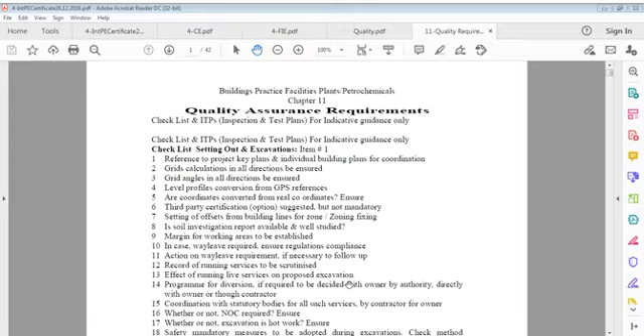This is in continuation to all that, and these are certificates. This is IntPE certificate, that is this one, and this is another certificate, Chartered Engineer. This is another certificate, Fellow of IEI, and then quality noting, and certain files and more files. I'm showing you for certain reason.

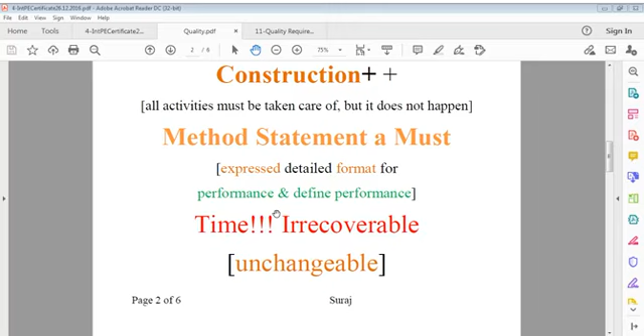And if you find that what you do can be better, then you can amend the statement. Not for you, it's for those who require your knowledge. Others will read this and they will like to make sure, yes, you are doing it this way. Once there is agreement that we are going to do this, that's the important point here. Why I'm stressing a method statement, that is the only reason.

It should be in expression, it should be in format, and it should be for performance and define performance. It's not simply that way, so you'll get this. No, you have to define. You have to define in sequence. How shall I get it? Based on support of material, based on support of drawings, based on support of codes, based on support of, you can say, past experience, all that. And you can refer to some project experience also if you wish.

And there we can say, we just take out from those statements redundant explanation and just put point to point, so that the message is communicated properly to the site line person who can easily do this or implement this. That procedure, that method statement, you must understand. It's not easy because you have to write something in 2 or 3 pages, not in book form, but you can talk a lot on that. So whatever you talk, whatever you learn, for something to be done, you may have to follow someone else's statement or your own statement, which others may follow.

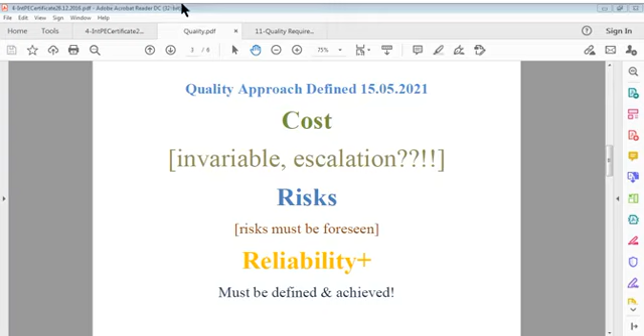And that is where we consider these factors, and that's why I'm saying reliability: you do something and it is reliable, then you do it again and it is reliable, then you do it again, it is reliable. Reliability, then reliability, like that. You have made sure that whatever you did is safe, whatever you did is serviceable, and whatever you do is durable, because durability is important in our world, the construction world, the design world.

If you just think of safety, and if you just think of serviceability by the use of the material that we produce, and we don't care for the durability requirement, the durability criteria, we can simply say we can't calculate the life cost, the whole life cycle cost of that material.

Today it looks fine, it's safe, it performs, but if it has no longevity, if it is just finished in 2 or 3 years in place of 40 or 50 years, this means you are going to lose. But if the same works for 50 years for me, by whatever way, I think it will reduce my cost. Got my point? You can take the example of polythene, the example of plastic. What happened?

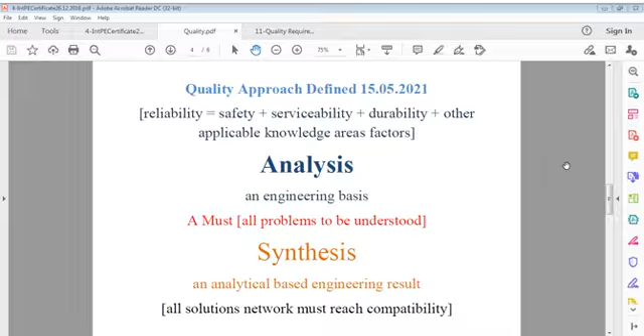I understand that analytical study is no less than worship. Is no less than worship. Because when you work with the persons, you can say my God gift, I should say God gift, is for everyone, and that is thinking. Thinking.

So there are some people who run away from thinking. Wait, I'll think. And other people consider thinking as religious, because thinking helps you. Thinking brings you out from unnecessary tension. Thinking is that part of life. And in engineering, I think thinking works at every step. Every step. It's not a verb. It is a whole world.

If you break this word, it's THIN and KING. Can you understand that? What does it mean? Well, that was just an aside. Now, we say engineering. Engineering means application of sciences, application of physical sciences, other sciences, application of technology. Right? That is engineering, and this must be achieved.

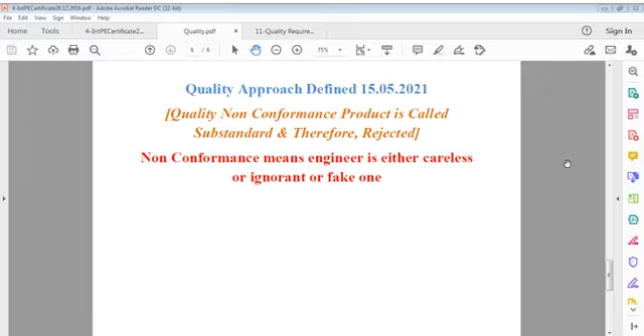When we say that engineering is advancing, what does it mean? I say engineering is not advancing, your thinking is advancing. Your understanding of materials is advancing. That is advancing. Engineering is use of mind. In fact, if you define engineering straightaway, I would say engineering is use of mind, because it's not only reading or writing, you have to analyze that material, to understand the theory of that.

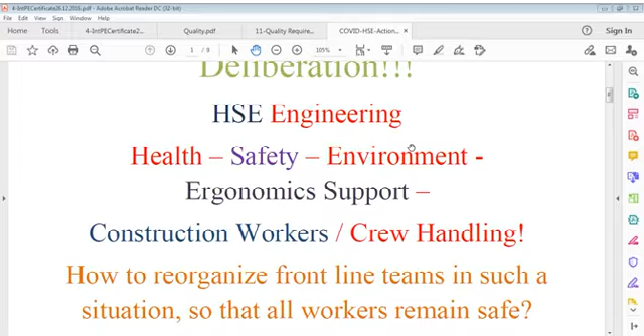Actually, in the contents of a method statement, if you leave behind scope of work, it starts with safety. Safety, health and environment we define to some extent briefly, though safety is available in the safety plan. We cannot simply write refer to that plan, because nobody has time to refer to it during the construction stage or during one or two days of construction.

Now, we have to define how we shall maintain health, safety and environment on this activity or on this project. We have to define that, and it's part of HSE. And before the HSE definition, we have to define what materials we are going to use and what drawings or other relevant parts.

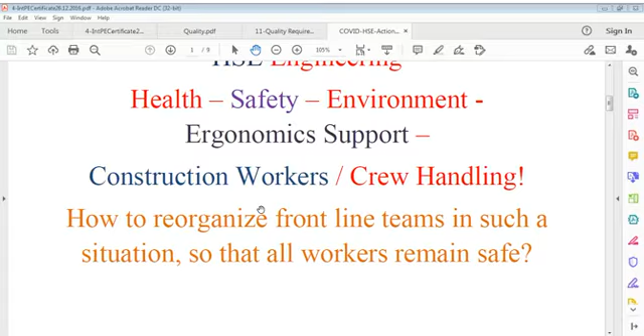How to reorganize frontline teams in such a situation so that all workers remain safe is a big question. And it is the responsibility of the entire engineering professional community, I'm saying it includes electrical, mechanical, and all others who are involved in our project, to contemplate on working issues that would be impacted due to additional protective measures required to keep off this ailment or this pandemic.

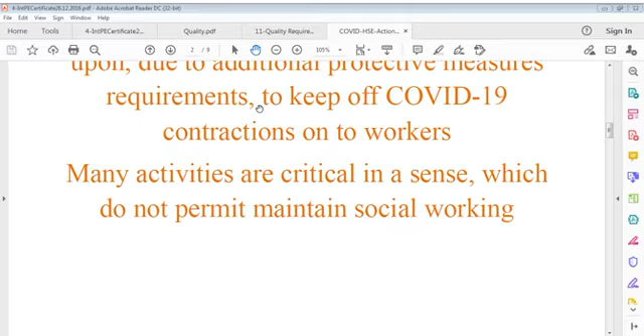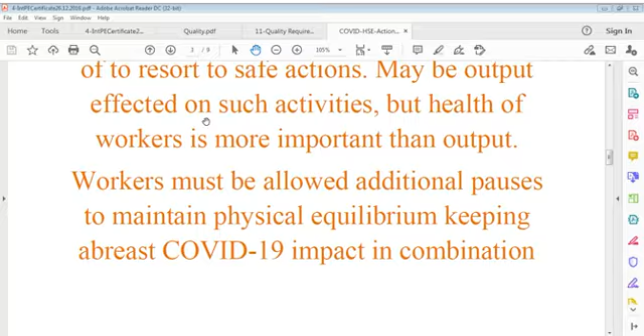Workers must be allowed additional pauses to maintain physical equilibrium, keeping abreast of this pandemic COVID-19 impact in combination with high temperature and variance in humidity. You know that high temperature and high humidity are supporting circumstances for the virus to develop.

Fresh air they should get in normal working, and when there is no normal working, for example, there is construction of some shell or some silo or some big tank. After the foundations are over, walls are over, you have to work in that, and sometimes your top cupola is also over. How should people go inside to work, and when they work, what should happen? This is a very true part of the problem.

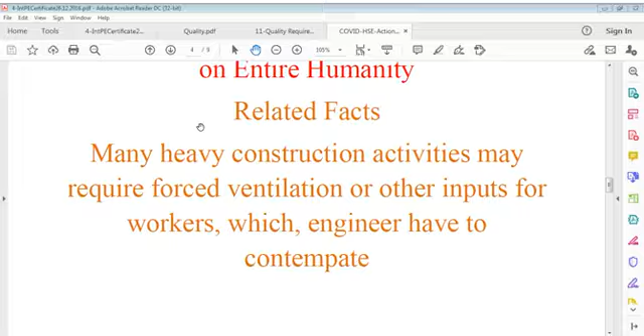We have to contemplate that many heavy construction activities may require forced ventilation too, or other inputs for workers which engineers have to contemplate. Now, these are all problems I'm showing to you, but I'm not going into that much. I'll just give you what I was saying regarding COVID-19.

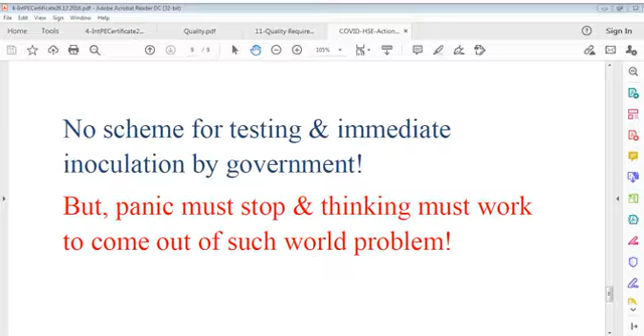Quality and safety are such related together, that without safety and without quality, survival is very, very difficult. Very, very difficult survival. We have to consider this point clearly, that survival is difficult.

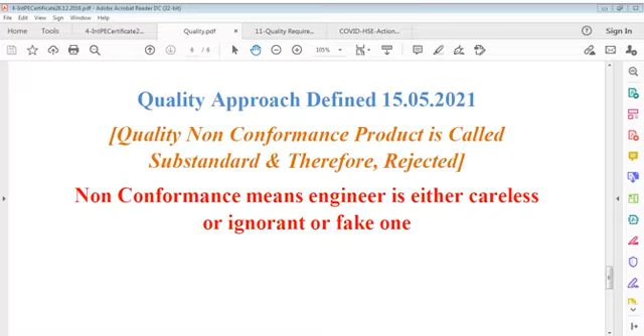So now, I've been involved in my thought to share with you. I do not claim my thought is wonderful, it's not, you can say, an exclusive one. But whatever I think based on my small experience and what I consider is better. Maybe you have better ideas than that. But I'm sustaining myself. So I'm giving you some imaginary views, imaginary talks where I feel a good one.

When I start quality checks, it looks as if it is something extraordinary. I also used the same in the beginning when I did not even start writing in newspapers.

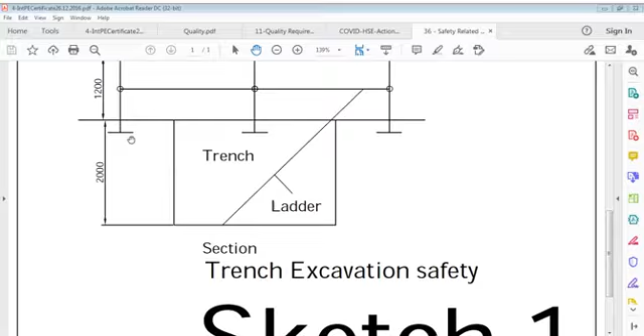And here is the section. Let's say I've taken 2 meters depth here, and the railing is here. This rail is called a safety post. I have put temporary safety railing around. Posts are here. This is enclosed access, where some area is available for access, and there's a ladder here. If it's more than 1.2 meter, 1 meter, we require a ladder because we can't jump. So this is an aluminum ladder here, a small one.

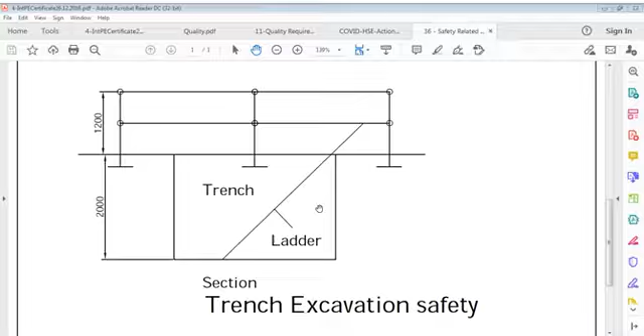So what do you actually need? If you want to excavate, we have to do it this way. This is trench excavation: a trench with railing around, 2 meter depth of trench and 1.2 meter height of railing. This is very practical for ordinary construction, and you should have this system on site before doing anything. I'll explain the sketch also. This is, of course, a safety related sketch.

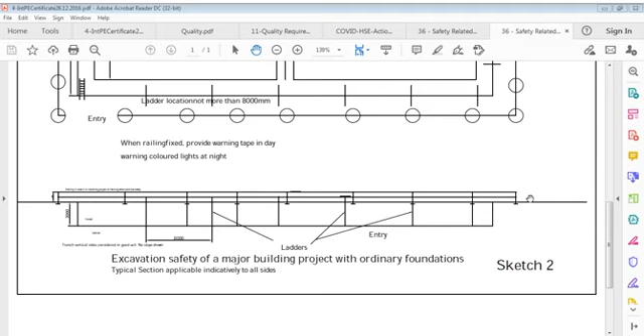Excavation safety of a major building project with ordinary foundations. I have named it sketch 2, and this is a typical section applicable indicatively to all sides. This is what it is. Yeah, this is the sketch here. You can read yourself what that means.

It's the portion of the building where you have to work. This is the building area, and there's a safety provision around it. These are fence posts or railing, indicatively, complete railing around, say 1 meter away, or as is practicable for circulation. This excavation is not mass excavation. This is limited excavation, a continuous trench, say 2 meter to 3 meter deep.

For example, this is your foundation portion here. You have to excavate and keep it safe like this. You have to excavate and remove excavated material simultaneously. So on site you will find the trench like this, and this is earth area, this also earth area, and this also earth area.

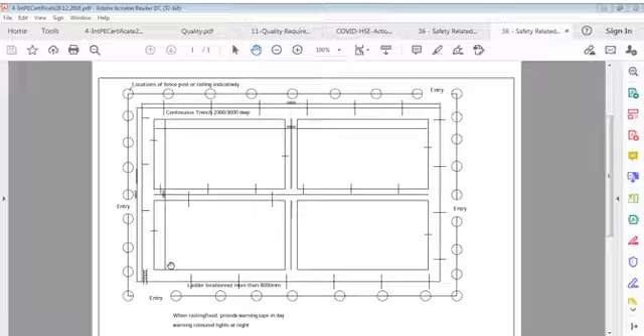That's a basic requirement, because I say the trench is deep, maybe 2 to 3 meters, and the width is of course natural. Whatever is not written depends upon your design. And these ladders here, these are all locations of ladders. I put this location, this location. These are locations of ladders, and this dimension that is used is 50 meters.

Let me just blow it up again. This is 50 meters here I used, and this is a very important one, from this point of view and that point of view, and I have to fence it accordingly. This fence is very important, and we have to think about this in a professional way. It's very professional. We have to think about this.

What is this here? Why is he calling? I don't know what the reason for that is. Who's this? Good morning. Yes, how are you? Hello. What do you want to say? I'm not hearing you. I'm okay, tell me what you want to say. I'm busy on video. Okay, okay. This was somebody who called me. Good morning, Mr. Chaudhary. Namaskar. Very good. Tell me more. I'm telling you everything.

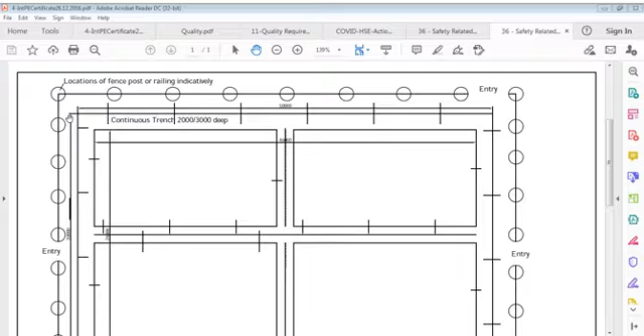Okay, now. So I was telling something about the sketch and it's gone missing. So what I said, it's 50 meters here, 50 meters here, and 2 to 3 meters deep. This here is 30 meters. Approximately the size of the building is 50 meters in length and 30 meters the other way, and in between this is 26 meters, if you take 2 meters here and here.

When railing is fixed, provide warning tape in the day and warning colored lights at night, and these ladders that I have shown are located not more than 8 meters distance. 8 meters maximum, from here to here to here. It can be less than 8 meters, but not more. This is a standard, because in 8 meters you have to take about 12 steps. One step is about 2.5 feet.

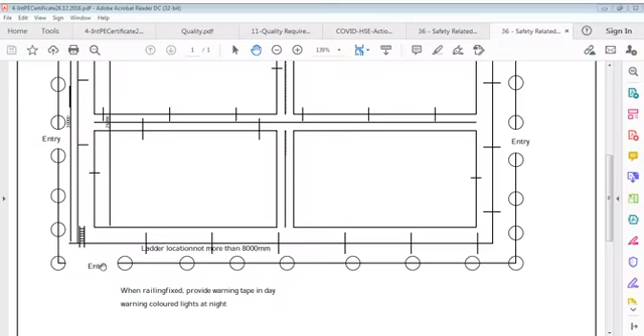Nobody wants you to spend time walking rather than working, because you have to walk and then ascend this ladder, and again come back, enter the trench and come out after walking. It takes plenty of time. Therefore, keeping in mind all these factors of time and cost and the number of these ladders, which are very expensive. One ladder may be many thousands or many hundreds of dollars.

So you can see how many ladders are there. Let's count: 1, 2, 3, 4, 5, 6, and 6 and 6 is 18, 20 here, 21, 22, 23, 24, 25, 26, 27, 28, 30, 31, 32. Sorry, 32 ladders in this. So it's expensive. 32 aluminum ladders we are using in the system, but we are helping our workers.

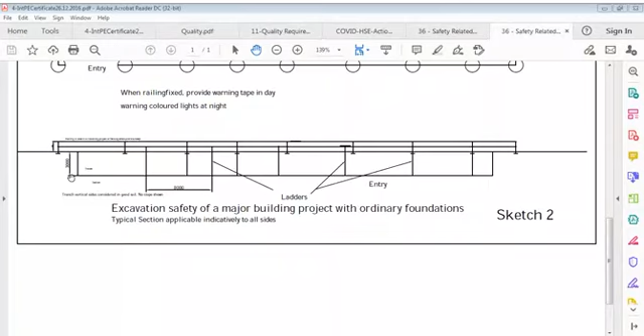I could keep them at 20 meters also, but that won't work. Better you keep them. If you have big projects, you can use them. This is a safety measure. Your people should be safe. Safety is the requirement here, and that is the purpose of this sketch. If you see this section here, this is 3 meters down, this is the trench from here to here, and these are the steps. These are the points of the posts.

We put this railing around, and this is the trench, and in the trench you can see I have put these positions of ladders. Excavation safety of a major building project with ordinary foundations, and I named it sketch 2. I think you got my point. I also wrote: when railing is fixed, provide warning tape in the day, warning colored lights at night. Warning tape in daytime, and warning lights at night.

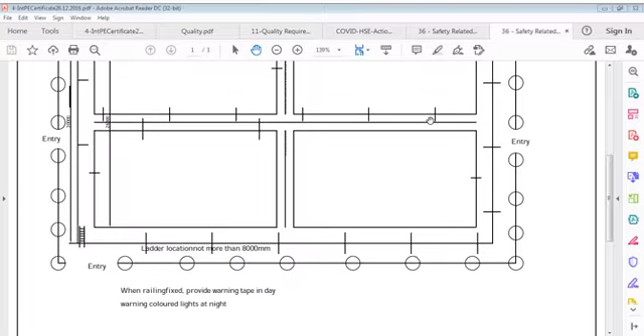This portion is not excavated. Just keep in mind, only the trench portion is excavated for substructure activities, and this is clearly given as 46 meters, and this is 50 meters. I just indicate this is not warranted for any site - this is only for explanations.

So I'm closing this file because I can't keep all these files open all the time. So I close this here, and I go to another file which is also for excavation - this organization chart. Let us see. Okay, see this one, this is another one.

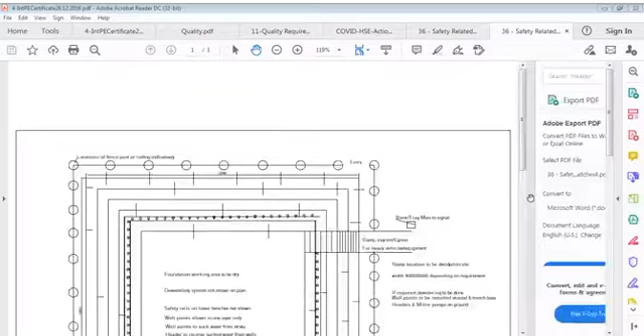I'll keep showing this sketch again and again. This shows excavation safety of a major building project with benching. Typical section applicable indicatively to all sides, generally applicable in clay and silty soil strata.

Excavation safety of a major building project with benching. Typical section applicable indicatively to all sides, generally applicable in clay and silty soil.

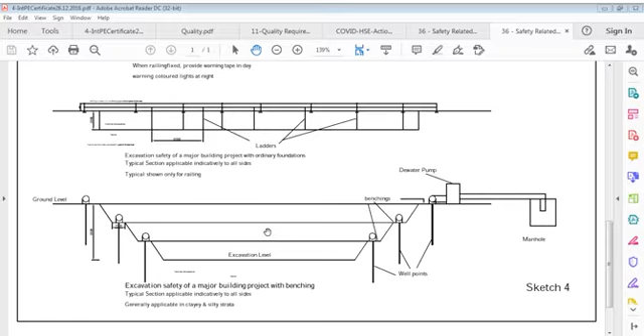Well, if you see the plan first, this is the plan. I think I should use this - yes, I think you are comfortable viewing this. This is an area, and this is an area, and this is an area.

It is foundation working area to be dry. It's written just, I'll blow it up and show you - foundation working area to be dry. Means wherever we have to work, that should be water free.

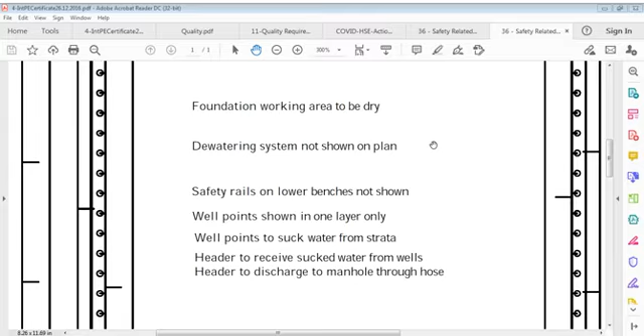Dewatering system not shown on plan. Safety rails on lower benches not shown. Well points shown in one layer only. Well points to suck water from strata. Header to receive sucked water from wells. Header to discharge to manhole through hose.

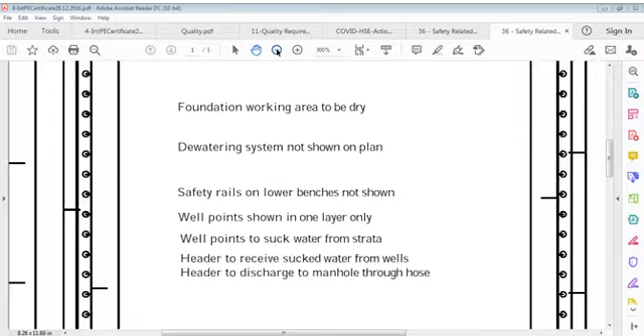Yes, I'll go back now. It's a big trench now. If I say dimension wise, this is 50 meters here, you can say 50 meters here, and this is the dimension of this, including benching, not internal.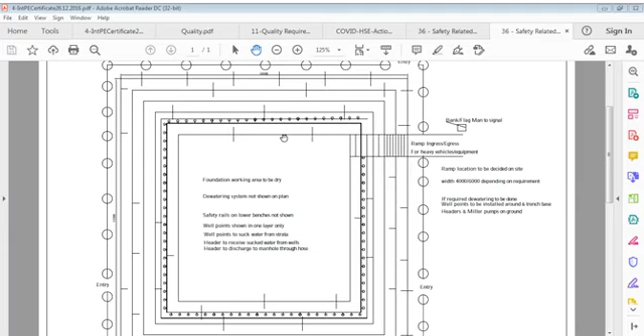And here also, how much is it? I think it's 50 meters, so it is 50 meters square - quite considerable. This 50 meters square is covered up, but the real working area is lesser than that. And this is because we have nothing in the surrounding, or we have space available for easy understanding.

Now I want to go to this trench. You see it's excavated, but when you start, it's not excavated. We are just trying to tell you about safety, that's why we assume this is excavated. This is that section, and this is that section - two sections are there. This is the longitudinal section, and this is the cross section. Both are there, you have to understand each other.

Now, first of all, let me explain to you in plan what this is. In plan, it says ramp, ingress and egress. Ramp is shown, and here is ramp. From ground here, we go down, and these lines are gradient lines, slope lines. When we show like this, it's slope.

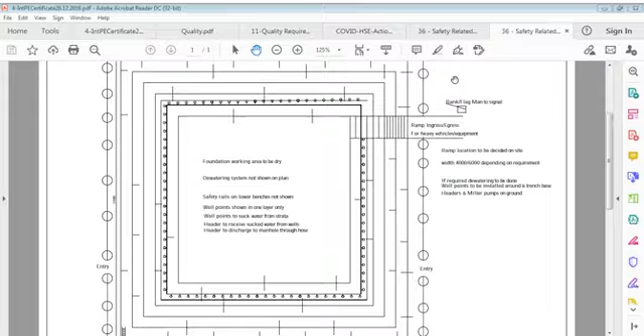We go down and come into this area, foundation area. Means whatever depth be there, you have to make some ramp for trucks, for others, because for people there are ladders. So it's only for transport - heavy transport, shovel, excavator, truck, or whatever machine, and even concrete pump, which you can say possibly, though we can do from outside also, no harm. And for convenience of all this, these are done.

It's a ramp location to be decided on site depending on your ease of working, and width is 4 meters to 6 meters depending on requirement. This is width of ramp, 4 meter to 6 meter, because your vehicles can come in - that's the purpose of this.

If this is suitable land for this, then if required, dewatering to be done. Well points to be installed around, and trench base headers and miller pumps on ground - trench base headers and well point is done.

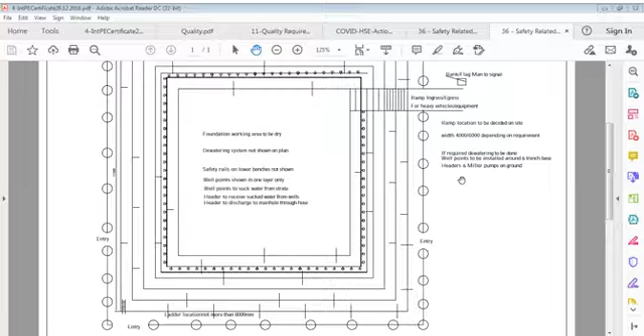Here is a trench. You can see these benchings as I showed to you. This benching, I'm talking of this benching. Excavation safety of major building project with benching. Typical section applicable indicatively to all sites, and generally applicable to clay or silty strata.

Why I have noted this is a point: clay and silt are two very different soils. Clay is a thixotropic material, and it is very porous and also not permeable. Maybe these are technical terms for everyone, so I need to explain this during my talk. What is this clay and silty soil, before going further? Because if you do not know, you will simply ask why it is so about clay and silty.

First property of clay is that it can sometimes stay vertical, or you may say the question of angle of repose doesn't apply there. Sand is different, it's the reverse - sand can collapse. Chances of collapse in clay excavation are rare. But this doesn't mean that it's stable.

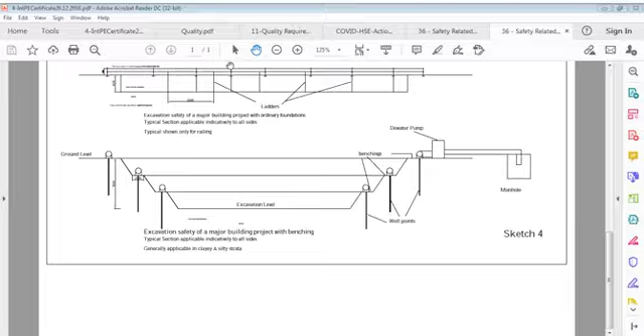But I'm saying that if you work in clay, you have to excavate, and you have to install a dewatering system. And these are benches - total depth, let us see how much this is. You can see this is 9 meters here. This is ground level, and here it is 9 meters down to here. This line, and in this portion only we shall work. Here is another one - this is called benching, and you go like this. This is benching, and this is ground. So at these levels, I have put the dewatering system.

Well point system - you can see this is well point. This is well point. This is well point. Well point means, when I say well point, I am actually referring to this. This is well point. Same way, this is well point, this is well point, this is well point.

Then these are headers. Headers means pipes which will communicate water from here to there, and that's a very important part of this.

That water we have to contain, but understand - why are these people just calling for nothing. Oh, I don't want to talk to this one, leave it.

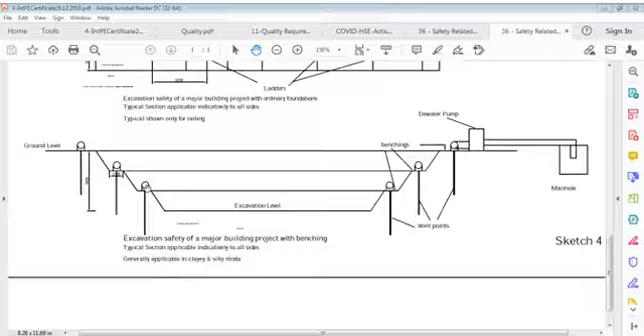Okay, then this part is very important - this is the excavation level, and this level is the well point. This water, when it flows up because of pumping, flows up into this well through a filter down below. If this filter does not allow clay particles to come in, water gets sucked up, moves up, and enters this header. This header, which I think is shown somewhere here - this is shown here. These are well points here. Only one layer I have shown.

These are well points, and this line which I am moving along, this is headers. These pumps are connected to this line. You can say, oh maybe some drawing error, no problem, but these are connected to this line. There's 1 meter spacing of this header, this well by 1 meter, like this. These are vertical pipes that I am showing you here. These vertical pipes are here, and this is connected to the header. And not in one section - this continues, this continues like this.

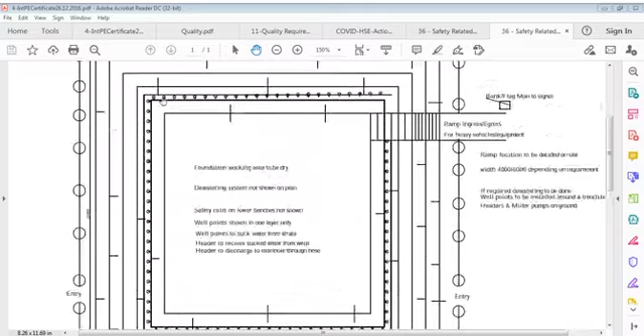So the water from all is called a ring, you can say. Water from this normal ring is taken out through a Miller pump or suction pump. This is one layer only I have shown, but if you see, there's one layer, second layer, third layer. That's where we say this dewatering is done continuously.

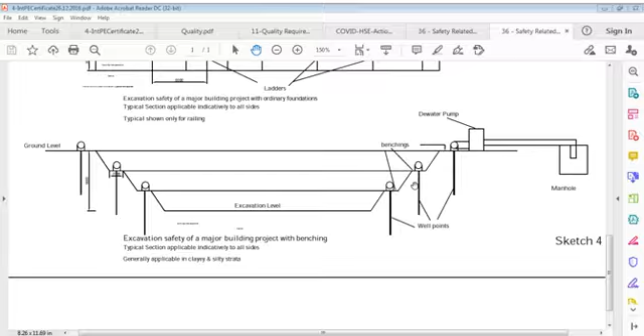Continuously it is done, and then we install here one, and go to excavation, another one we do here, another one we do here, and this goes on until excavation is over and foundations are over. When all foundations are over, we come up to this point, then these well points are removed. This I'm talking of well points, not sand soils or submersible pumps. It also holds good for that.

Here we can say there's a pump here, this is benching, benching is well points, and here is that header, this is the pump. All these three are connected. This dewater pump here, and from here you take it to the public manhole. See where the manhole is, you take it to the public manhole and dispose of it. This is the sole purpose of this well point, but our purpose is not well point, our purpose is safety here.

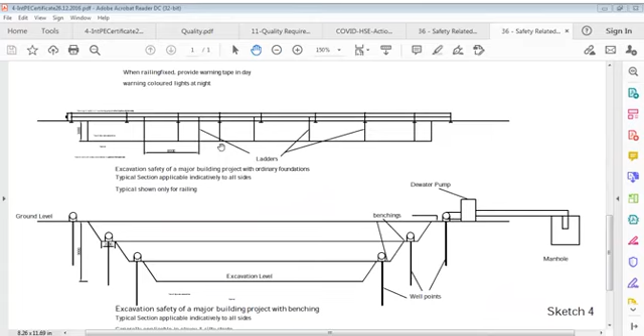If you see the elevation of this safety railing, you can see I put railing here on this trench. This railing here, of course a standard railing as usual, so people should not fall in. Maybe 1.2 meter, probably, it's not clear, so it doesn't matter, but 8 meters are here. These are ladders, and this is only for the purpose of this. Put everywhere, here, and as you think safety should be maintained, we can do like that.

This is safety railing, these are ladders here. Excavation safety of a major building is written - excavation safety of a major building project with ordinary foundations. Typical section applicable indicatively to all sites. Typical shown only for railing. This is excavation safety of a major building project with benching. Typical section applicable indicatively to all sides.

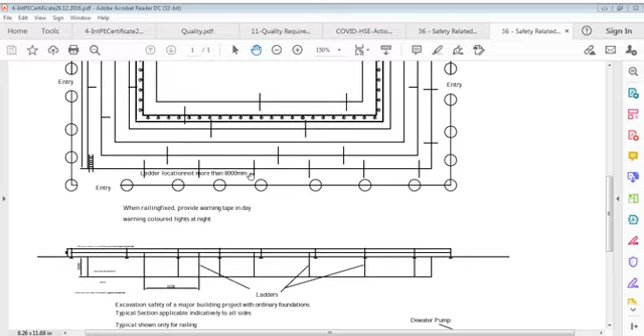Here is a ladder location not more than 8 meters, and this is what I explained to you. You can view it, no harm. Viewing is also important.

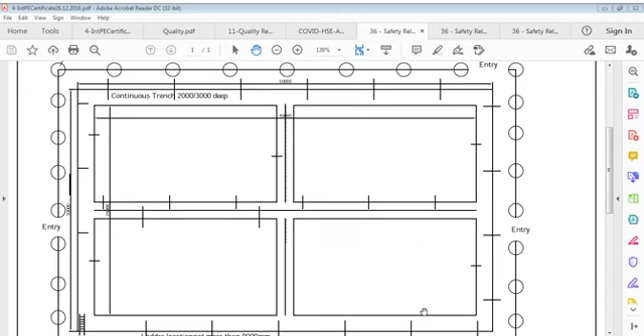Also, this is a sketch, I put off other sketches. I think I can't open all these sketches, so I put this sketch and this sketch off. Why both sketches come up, I don't know. This is the sketch, okay, that I keep off. This is here and this is here.

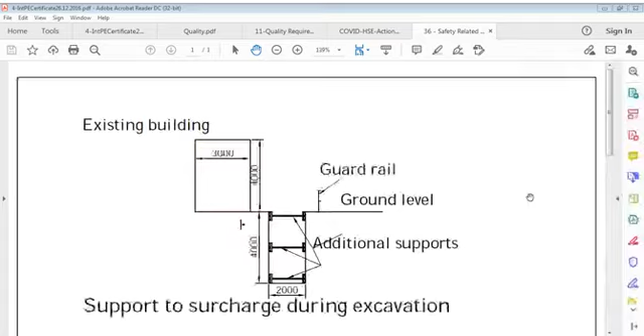That is here, which is okay. This is also an important one. This is this sketch which is showing you here - this is section support to structure surcharge during excavation.

See this excavation here, let us say 2 meter wide, 4 meter deep, and this is surcharge here. Here, existing building, let us say existing building, whatever it is, 3 meters by 4 meters, just for example, and this 4 meter depth. I have to put some support to resist this building as much as possible in this trench, which is already excavated, and we have to support this, and that's called support to surcharge during excavation.

And this is surcharge, and this is guardrail, this is ground, and that's then also the same existing building. It's 2 meter here, 4 meter maybe. So this side we have to put both sides, also both we see, we can say additional supports here, also the same way, ground level guardrails, and it can support during, and also it brings even more, right?

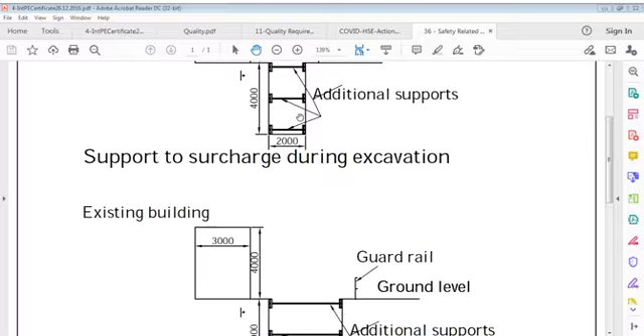So if it's a small one, means there was 2 meter and there were 4 meter, so we tried to link both things. So to resist this is here, and to resist this is here. But here there's no resistance required, so we just keep the supports here, additional slanting supports and support to surcharge during excavation. Simple, you can understand that.

Then we can go to the other one, that's 7th, and that is here. This is not for excavation, this is for scaffolding work. As with scaffolding, I said to you, it's required everywhere. Access is required everywhere. So now I close off this.

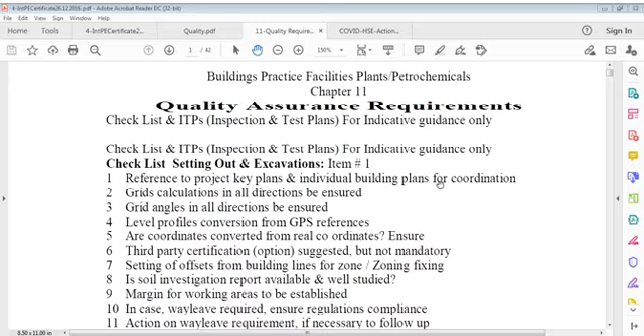There are so many sketches I showed to you regarding this excavation that I talked about that day. I can repeat, I can read again if you wish, and that is here. Reading is important and learning is important, so this is the checklist and ITP. These are inspection and test plans for indicative guidance only, and it's a checklist for setting out and excavations. And this I name item number 1.

You can name whatever number in your own list. You can schedule out your own list. It doesn't matter. Now the reference is to project key plans. You have all key plans with you, all detailed plans with you, the relevant ones. And if it's for an individual building, you have individual plans for that and for coordination purposes. Now grid calculations in all directions should be ensured. This is a very important one.

People may be confused with that. What are grids? Do you know what grids I'm talking of? It's something you chart out, you make graphics on your plan, x, y axis, both x axis and y axis, and you can say this is my grid. I can explain to you.

Well, maybe just a minute. Let me see if I can find that grid. Let us see if I can find it from my own method statement. Explanation is sometimes more important here.

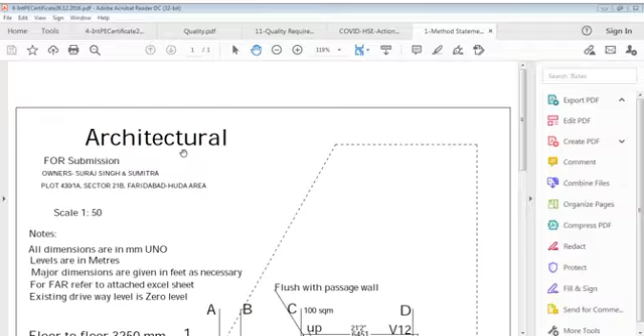Before that, this is a house. Okay, this house, and this is the grid. Let me show you this grid. This is the foundation. All right, I'll show you this grid now. This is an architecture I'm showing you. It's a house plan, and I'm not going to detail this out now.

What I'm trying to show you is, for example, basement, storage, and this is the x-axis and this is the y-axis, vertical, horizontal. Here I put some axes of these columns. This is the axis of this column here as well as this way. This is known as grids A, B, C, D, and 1, 2, 3, 4, 5 likewise. You can do whatever you wish. The purpose of this is to control our work, because this is just nomination.

In addition to this, we can also name these columns. But even if you don't name these columns and beams, they are already named. For example, this column I want to name is B2. Simple. If you name C1, C2, C3, it's B2. It is C1. It is D1. For example, A3. What's wrong with that? This is direct graphical understanding, and we are engineers. We are not kids.

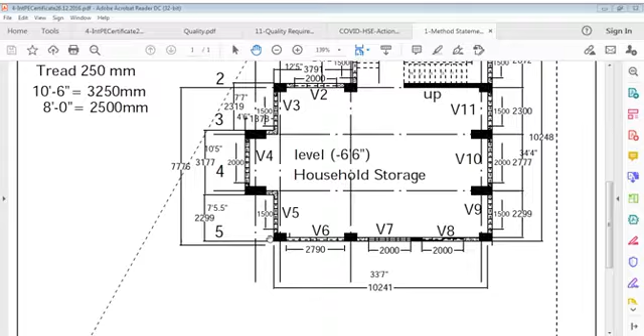For example, here also when I say grid B, this is B5, C5, D5. What's wrong? What's in the coordinates I don't understand? These are grids. Now I tried to show you that, and now I close it.

Then we come to where I was talking. There was a sketch here, sketch 1, I have shown to you already, and then we have this excavation safety. I'll show another one. Raft. Okay, raft, and sketch 4 is this. I guess sketch 5 is this. Then I'll show you the raft. This is the sketch of the raft.

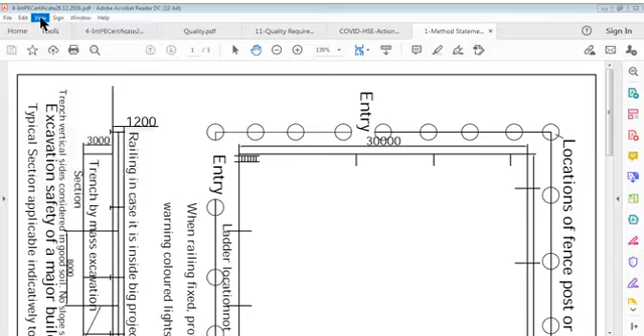I'll view it differently. So this is the raft. You can see this is the raft here, 50 meters this way, and let us say 30 meters this way, just for indication purposes, and this is its elevation. So this is 50 meters this way and 30 meters this way. This is excavated, and this is the safety rail around.

Because there's no benching in this, there are ladders here, and this is the ingress, egress ramp for heavy vehicles and equipment. This location is to be decided on site depending on the orientation of the site and the circulation of your vehicles. This width should be 4 meters to 6 meters depending on requirements for your transport.

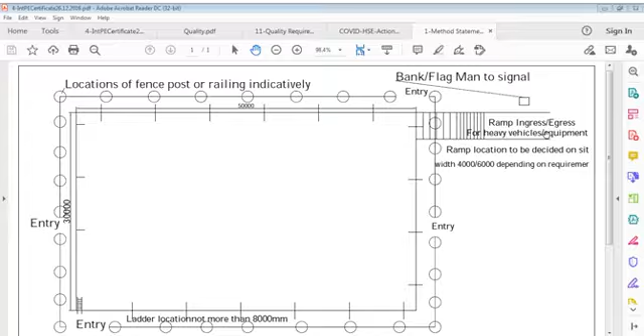You may take trucks in, machines out and trucks out, or whatever way. And this is not generally meant for people. People have to use these ladders because we have to avoid accidents also, because the flagman is here.

This is entry. There's no ban to public entry or people's entry, but in case when transport moves here, excavators, trucks or other vehicles work here, in that duration public movement must be avoided so that accidents are prevented. That is the main purpose. Otherwise there's no ban at all.

When railing is fixed, provide warning tape and warning color lights at night, and if required, dewatering to be done, well points to be installed around the trench base, headers and Miller pumps on ground. And this is your railing here in your elevation or longitudinal section.

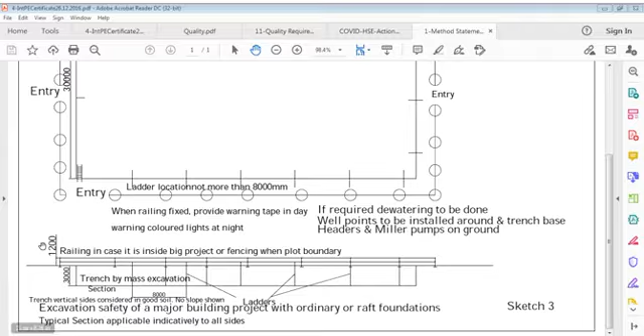It's given excavation safety of a major building project with ordinary or raft foundations. Typical section applicable indicatively to all. This is the depth of that excavation, 3 meters. This is 1.2 meters railing, and trench by mass excavation. Mass excavation means the whole area is excavated. How will you start?

This ramp is there. You have to start first on ground, then as depth goes. You can start from here and go down, and the ramp is also built at the same time. First you have to build the ramp and start excavation, so that all this area is covered. Our trucks may come up to here and go out.

If you want 2 ramps, 2 way also. It depends on site requirement, because 50 meters movement of truck is also expensive. If you have chances here, and it doesn't cause any problem in your raft, you can take here also. But in whatever way, one is essential. You may take one diagonally across also if it permits.

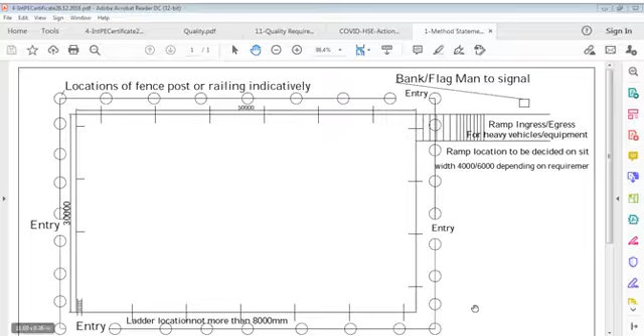That's an important point. Then sketch 4, what is that? It's already done. Deep excavation and trench support we have done. So all these foundations. So then I should come out of this because this is over. So that's the purpose of this.

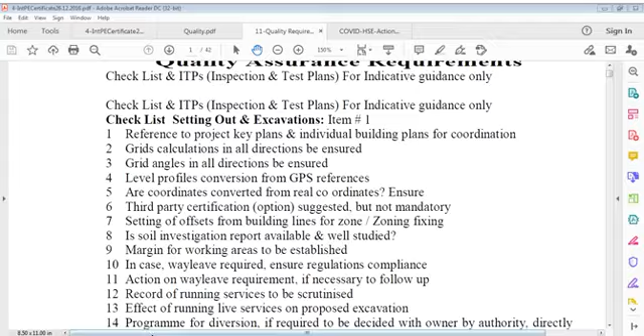So you have here grid calculations in all directions to be ensured. You have seen a typical grid plan. This is the grid plan. You have to rely on these grid calculations before you start your work. You have to make sure that center to center distances tally with the main overall end to end dimensions, and the sum of grid dimensions must tally. If there are angular measurements, they must be worked out and checked.

Level profiles conversion from GPS references, I talked earlier. Whatever horizontal and vertical controls must be established on site through GPS, probably by a third party, which is more reliable, so that they are certified. And coordinates, which are horizontal controls, are converted from real coordinates to plant coordinates. Your reference coordinate is more important.

Sometimes we don't want to give plant coordinates to the contractor for some reason, so we convert those coordinates to site coordinates, working coordinates for site, for example fixed at 100. We say on site, this is your coordinate; from this you can take whatever you want. It won't change dimensions, but it changes coordinate values. Same thing, level can be fixed: from this 00 level you take your levels, and that 00 level is written somewhere in GPS.

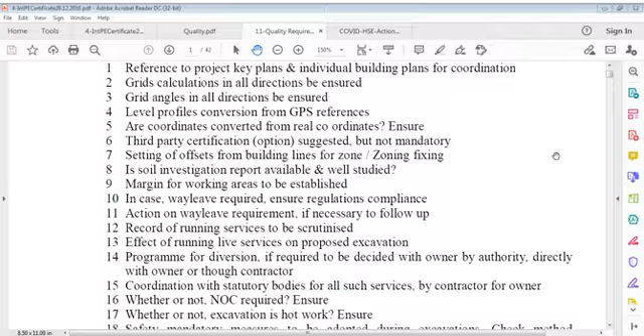It's better for you. Setting offsets from building lines for zoning: front setback, rear setback, side setback. That is according to plans. I can't change that. Or soil investigation, a very important part. Without soil investigation, sometimes it's a problem. And the question is: is the soil investigation report available and well studied? That's the point. Soil investigation report.

If you have that one, because it's considerable, you spent money on that one, you must study that. You must have a conversance with that. It must be, or else it's a problem here.

Just keep, I'll be back, I think.

Soil investigation report is very much important. If you have that, study it before doing everything. Don't touch the site until you go through that, because it's a technical report and it can be understood only by technical persons, well experienced engineers. And the soil report gives you so many parameters. It shall give you the history and location. It shall give you what methods were used for investigation, borehole logs, bearing capacity, electrical resistivity and thermal resistivity, and many more parameters.

So you go through all those reports and understand them, because whatever is in the design, how it will impact your work. If it is soft rock, or clay soil, or sand soil, maybe limestone, moisture content or not, dewatering required or not. You shall know that from the report, and what the technician or designer suggests there: what should be your bearing capacity, what should be shear stress, at what level you have to keep that, what other precautionary measures, or whether soil improvement is required.

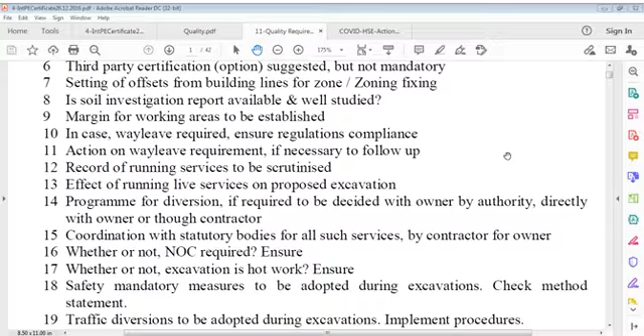Then you have to know if there is some geographical report available. Maybe sometimes the geographical report or geotechnical report includes some indication about the existence of services, but if it's not given, no problem. You know which land it is, which plot it is, and which statutory authority in that nation is applicable to that. And if you want to make sure whether or not live services are working in that area underneath that plot,

you have to contact those departments, bodies, authorities for electrical live lines, water live lines, sewer live lines, and many other live services. And also suppose your site is located in a certain operating area, a certain plant area, then this is more powerful. Your obstruction is more likely. You have to contact those departments and authorities to find out the facts. Otherwise, this could cause a big issue in future.

If you damage that service line, and that line may be coming to you or through your plot from different areas where some plant work or facility work is ongoing, and if you crush that pipeline or electrical line, it's a big problem. You may face, in certain cases, even imprisonment, as well as heavy penalties. So this is a very serious matter. That's what I say: don't be a civil engineer alone, or a structural engineer alone. Be a compact, comprehensive engineer, coordinating engineer, lead engineer.

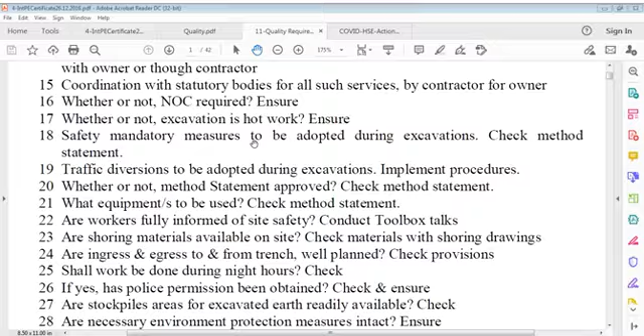Safety mandatory measures to be adopted during excavations. I have already shown you some sketches, but if it's an operating area or some other area with a specific requirement to go to them and seek permission, that permission can be obtained in terms of a permit to work, PTW. A hot work or cold work permit to work you can obtain from there, and you must have some person approved by them. Then you have to draw up method statements, and for every work permit you require method statements. That method statement is included with your application, the authority people scrutinize it, and they issue you a limited duration permit.

It may be hot work or it may be cold work. Sometimes it is for 3 days, sometimes for 1 week, and there's a duration within which you can do that, but they should know what you are doing. This involves all safety measures, which are very, very strict in those areas. And quality, you should worry about yourself when you are in charge. As far as safety, traffic diversion, road crossings or whatever else is concerned, it just happens.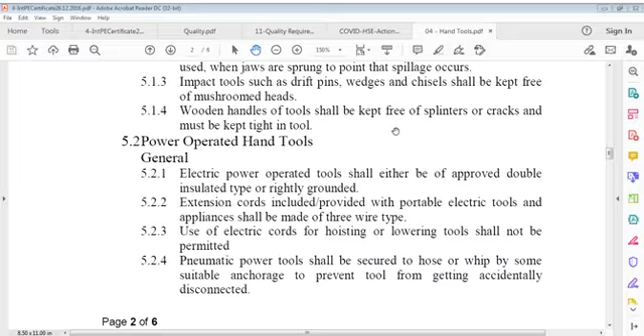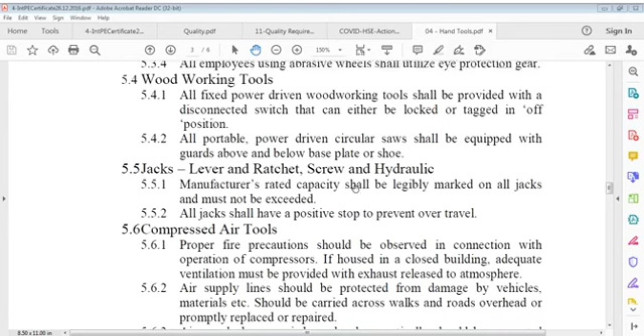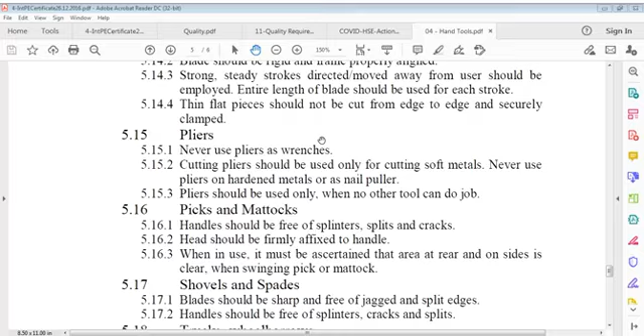Then it is hammers, wrenches, chisels, punches, screwdrivers, hand saws, hacksaw, pliers, picks and mattocks, shovels and spades.

Like that, I'll take up later on to show you that this is possible, but we're going to save some time. We'll discuss this - safety related sketches and tools. Then I have to take this to - just let me save it, please. Just a minute, okay.

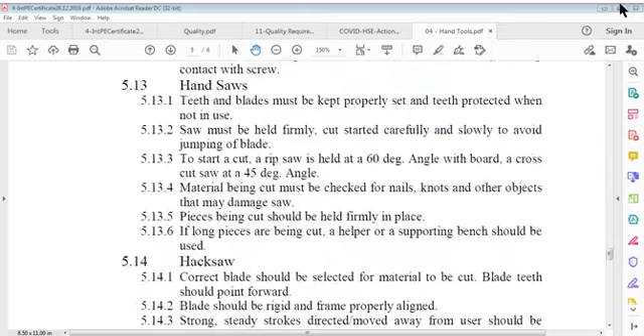So I put this off now. Okay, so this is just a file I showed to you about toolbox talks. So you have to explain to them.

I have to explain - once I actually called my all staff in one project, all foremen, many, about more than 25 foremen there, and it was a business hospital project. Call them.

Also call all engineers. Then, in conference hall, I started talking with them, but they were surprised why I called them - all staff, site staff, not office staff. They work, miscellaneous and nationalities, meaning different languages, but because they had some accident on site, I wanted to make sure

how much they knew about tools arrangement, tools organization - all tools, grinder, hammer, small hammer, how to nail in, how to use your generator, small generator, drill, hacksaw, saw. Meaning small tool or big tool, power operated tool or non-power operated tool, whatever we do, there is a way to work on that tool with safety.

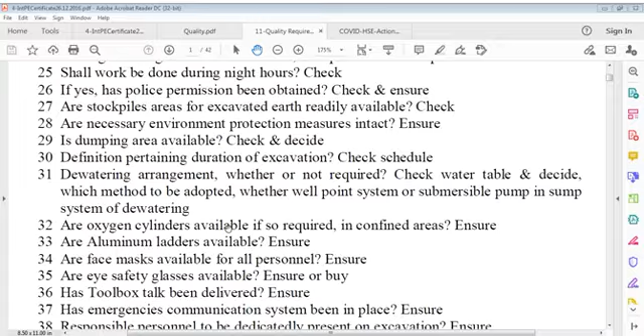That's laid below the foundation. That's a very important point. Now we have talked about this stockpile material. Necessary environment protection measures should be kept intact. Regarding stockpile, you should keep in mind that it doesn't convert itself into a dust storm and doesn't spoil the site. It should be well protected, because during screening, and during converting this stockpile and mixing it with other selected imported fill material in some ratio, it can also cause dust flow. So if environmental protection laws are applicable, you have to dump this in whatever area is available.

Also, dewatering arrangements you have to take care of. Whether or not dewatering arrangement is required, you have to decide. If it's required, we have to install that from the very beginning, before even starting excavation, by well point system or other systems. So whether or not dewatering arrangement is required, you have to check the water table or site report and decide which method to adopt, whether well point system or submersible pump system dewatering.

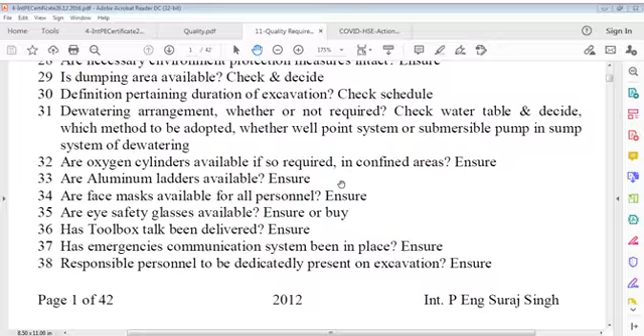Emergency numbers should be available on site. Emergency communication system should be available on site, and responsible personnel should be present. So we have to keep all these points in mind: personal safety, work safety, group safety, toolbox talk, emergency requirement, responsible person to be dedicatedly present, site supervisor role, and monitoring role.

Then, water tanker availability. Is a water tanker available for spreading water, to spread water on the ground to keep dust down?

Or have neighbor located existing buildings in the vicinity been checked? You can say nearby old buildings - have you checked their foundations, or collected information about them? Have neighbor located existing buildings been checked for possible adversity or subsidence in case of deep excavations?

In case of deep excavations with dewatering, check and ensure stability. What is stability? I am telling you this because it's very important from an engineering point of view. There are vicinity buildings, and you are going to do deep excavation. First of all, maybe those buildings are above your foundation level, meaning neighbor buildings are situated on clay soil, for example, or even sand soil of weak strength.